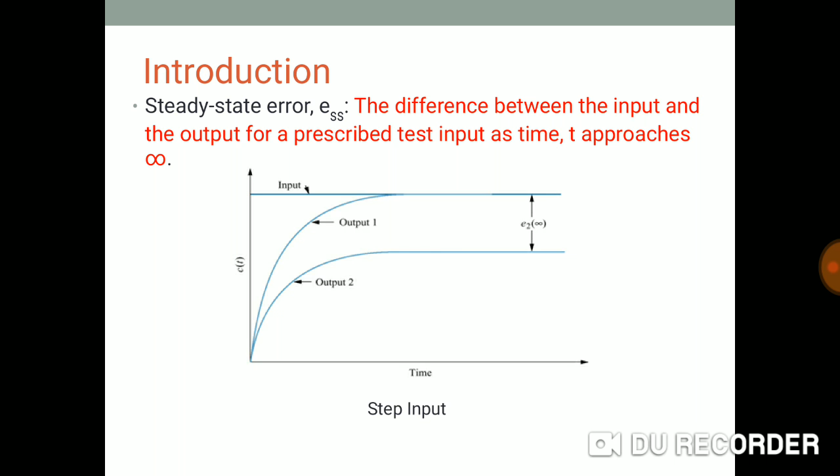First, we'll discuss steady state error. As its name implies, error is the difference between the input and the output for a prescribed test input as time t approaches infinity. Here we consider the step input signal and what kind of output we are getting for the input. Whatever difference we get between input and output 2, that is nothing but an error. Next, the same we have discussed for a ramp input also. Steady state error is designated by e_ss.

Then we'll discuss the test inputs. Test inputs are nothing but different signals. By giving these inputs, we can find out the output. These signals are called standard test input signals. Actually, test inputs are used for steady state error analysis and design purposes. Step input represents a constant position. It is useful in determining the ability of the control system to position itself with respect to a stationary target.

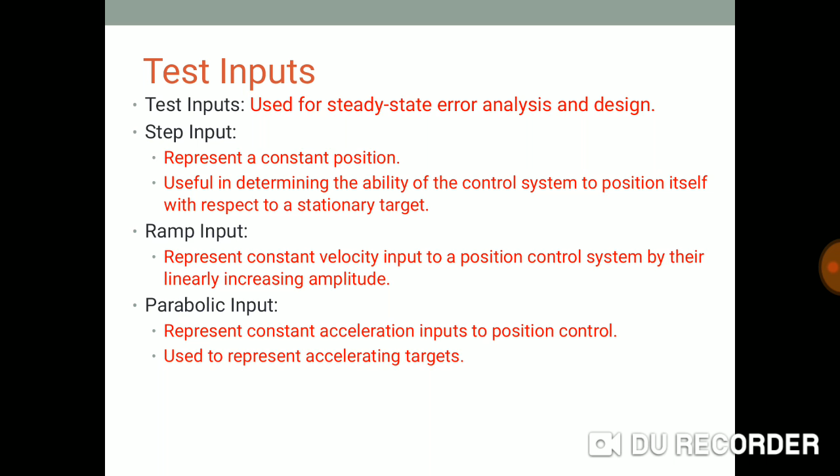Another input is the ramp input. It represents a constant velocity input to a position control system by its linearly increasing amplitude. And the third one is the parabolic input. It represents a constant acceleration input to a position control system. It is used to represent accelerating targets. These are the test inputs.

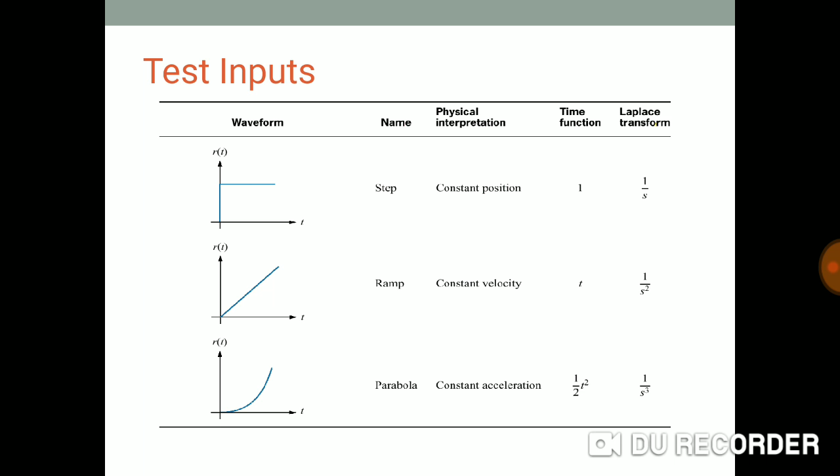The first column shows the waveforms, that is step input, ramp input and parabolic input. Then the physical interpretation: a step is a constant position, then constant velocity and constant acceleration. The time functions for the step, ramp and parabolic inputs are 1, t and 1/2 t squared. And the Laplace transforms are 1/s, 1/s squared and 1/s cubed. One by one we will discuss.

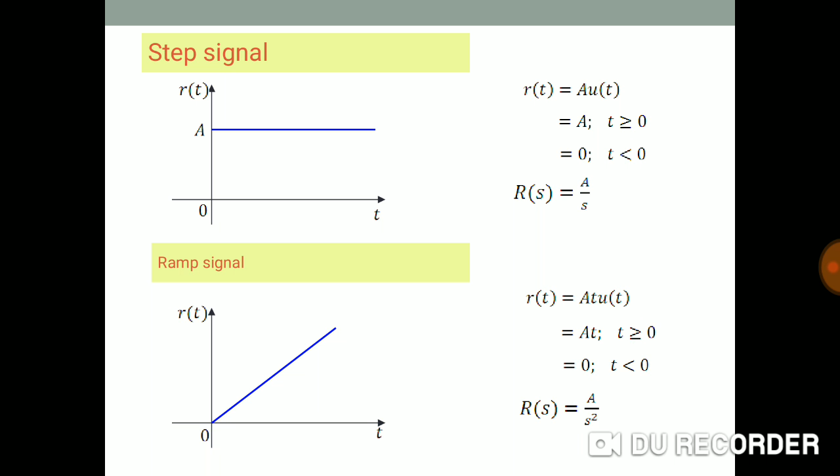First one is the step signal. Here r(t) = A u(t): it is A if t is greater than or equal to 0 and 0 if t is less than 0. The Laplace transform is A/s. If we consider the unit step, that will be 1/s, as A is equal to 1. The same is applicable for the ramp signal. For the ramp signal, r(t) = A t u(t). The function is At if t is greater than or equal to 0, and 0 if t is less than 0. Then the Laplace R(s) is A/s squared.

Next, the parabolic signal. The reference signal r(t) = A t squared u(t). It is A t squared if t is greater than or equal to 0, and 0 if t is less than 0. The Laplace transform for that one is 2A divided by s cubed. And if we consider the constant A as 1, that is 2 divided by s cubed.

Then the impulse signal is delta(t); it's infinity for t equal to 0, and if t is not equal to 0, it is 0. The Laplace transform for the impulse is 1. And the sinusoidal is r(t) = A sin omega t. The Laplace for that one is R(s) = A omega divided by s squared plus omega squared.

Next we'll discuss the unity feedback system. To determine the steady state error, we'll apply the final value theorem. The final value theorem is f(infinity) = limit as s tends to 0 of s F(s). The following system has an open loop gain G(s) and unity feedback since H(s) is 1. This is the block diagram to find E(s). Here unity feedback means the output is directly connected to the input.

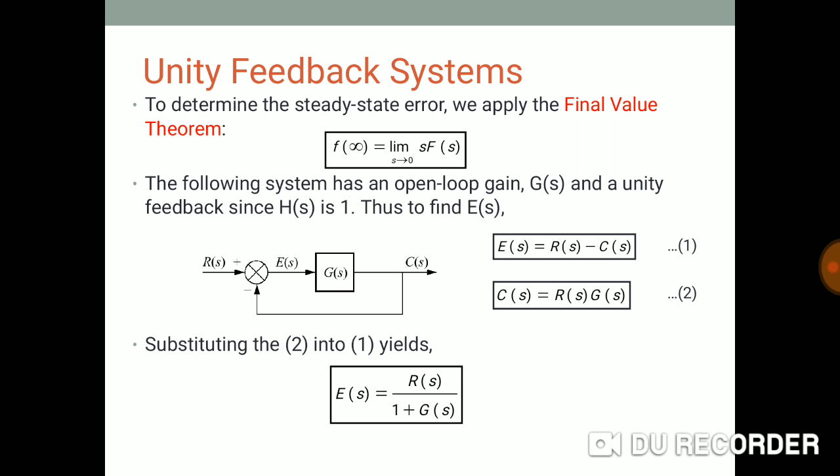Therefore, E(s) = R(s) minus C(s), and C(s) = E(s) G(s). Substituting 2 into 1, the error E(s) is equal to R(s) divided by 1 plus G(s). H(s) is not there as we have considered unity feedback.

Next we'll apply the final value theorem. E of infinity is equal to limit s tends to 0, s into E of s. The equation we got for E of s is R of s divided by 1 plus G of s, then multiplied by s. Therefore limit s tends to 0, s into R of s divided by 1 plus G of s. This is the final value theorem for the unity feedback system.

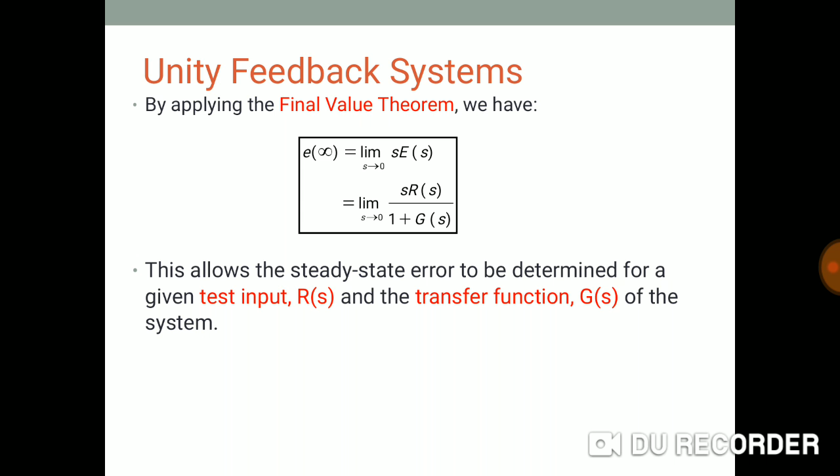This allows the steady state error to be determined for the given test input R of s and the transfer function G of s of the system. Then we will apply the final value theorem for all the inputs: unit step input, the parabolic input, and the third one is the ramp input.

The first one is E of infinity is equal to limit s tends to 0, s into the step input 1 upon s, the Laplace of that, divided by 1 plus G of s. Instead of R of s we have put the value for the unit step from the table we prepared; the Laplace of the unit step input is 1 upon s. We put that here and apply the limit. The s's cancel, giving 1 over 1 plus limit s tends to 0 G of s.

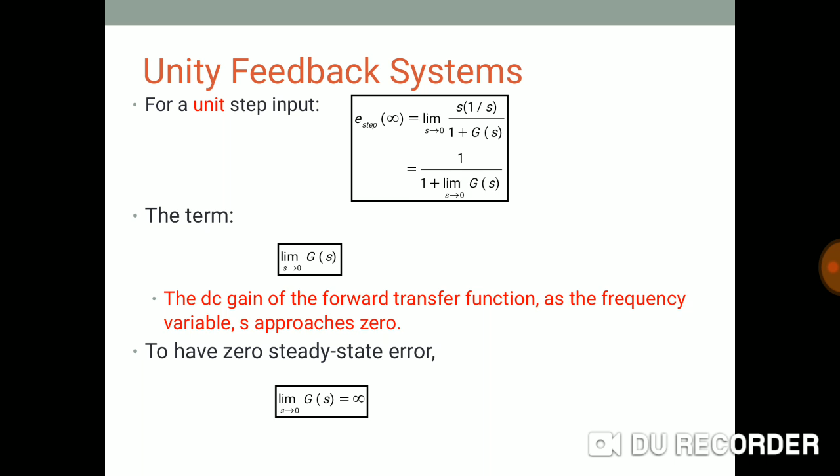The term limit s tends to 0 G of s is the DC gain of the forward transfer function as the frequency variable s approaches 0. To have zero steady state error, limit s tends to 0 G of s should be equal to infinity. The next one is the ramp input.

For the ramp, R of s is 1 upon s square. We put that in, therefore 1 upon limit s tends to 0 s into G of s. This is the steady state error ESS for the ramp, which is zero when limit s tends to 0 s into G of s is infinity. If there is no integration in the forward path, limit s tends to 0 s G of s is equal to 0, and the steady state error will be infinite.

Next for the parabolic, s into 1 upon s cube, divided by 1 plus G of s. The s's cancel, leaving 1 divided by s square plus limit s tends to 0 s square into G of s. For the steady state error for the parabolic to be zero, limit s tends to 0 s square G of s should equal infinity. If there is one or no integration in the forward path, it is equal to 0.

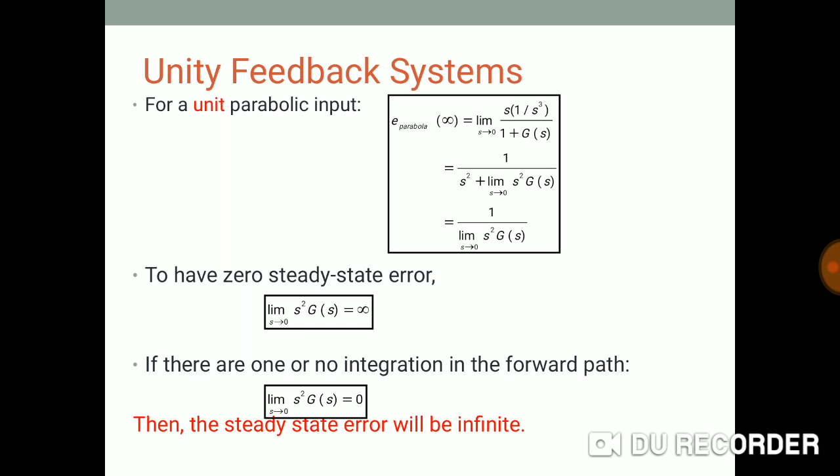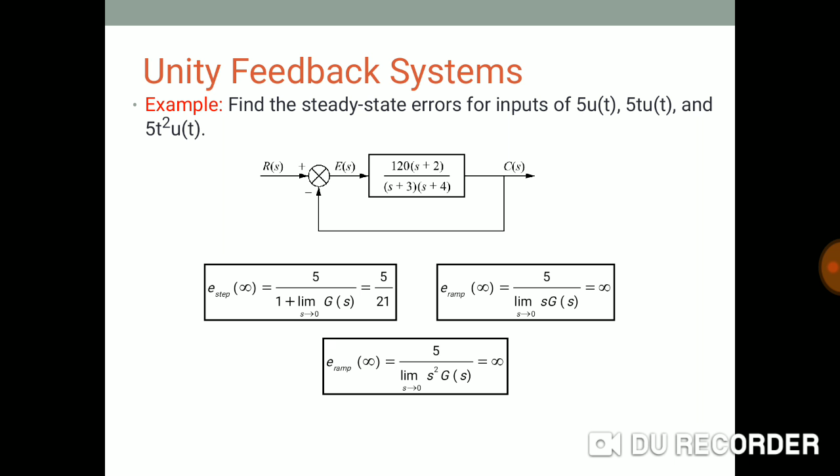This is the example for that. Here we'll apply the inputs, that is 5u(t), 5t u(t), and 5t square u(t). The G of s is provided for us, and we have the formula for all three. ESS for the first one, the unit step, is 5 divided by 1 plus limit s tends to 0 G of s. We have to take the limit of G of s by putting s tends to 0. Therefore here it is 120 divided by whatever G of s gives, so it is 5 divided by 21. By putting the values in the formula provided, we'll get the answer.

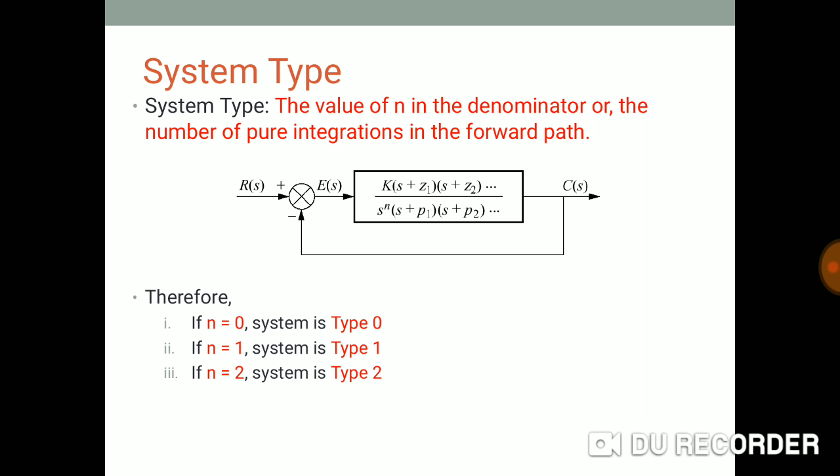Then we'll discuss the system type. System type is the value of n in the denominator, or the number of pure integrations in the forward path. Here is the formula: K into (s plus z1)(s plus z2)... divided by s raised to n into (s plus p1)(s plus p2).... If n is equal to 0, this is a type 0 system. If n is equal to 1, this is a type 1 system. If n is equal to 2, this is a type 2 system.

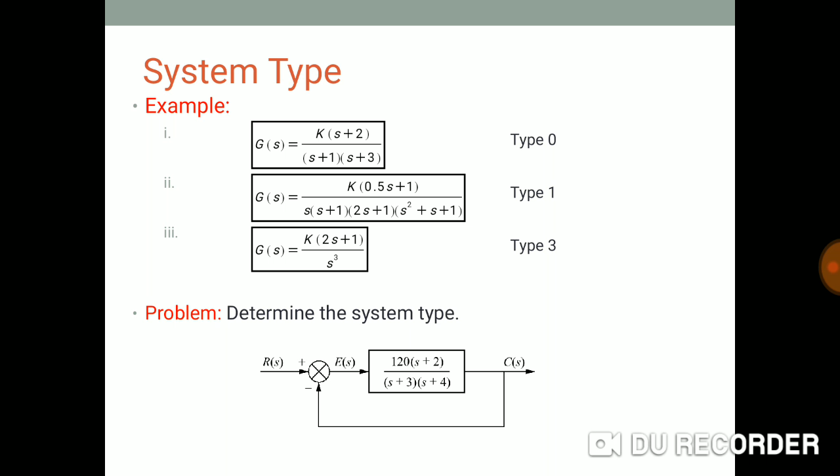There is no s term present, therefore it is type 0. Then the second example below: G of s is equal to K into bracket 0.5s plus 1, divided by s into bracket s plus 1 into bracket s square plus s plus 1. There is s raised to one term, therefore this is type 1. In the same way, the third example is for a type 3 system. Here the example is to determine the type of the system.

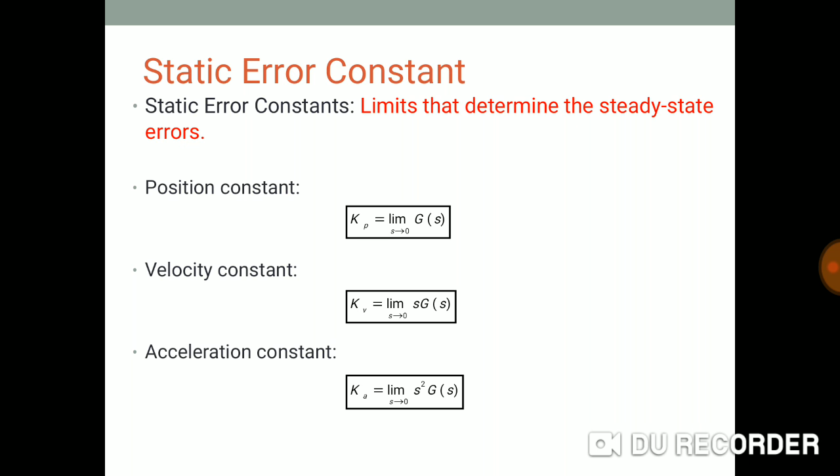Then static error constants, the limits that determine the steady state error, that is the position constant. Whatever formulas we got by giving the inputs, that is the position constant, velocity constant and acceleration constant, are called error constants, denoted by Kp, Kv and Ka. Limit s tends to 0 of G of s, limit s tends to 0 of s into G of s, and limit s tends to 0 of s square into G of s: Kp, Kv and Ka. Then we'll find out those values for every input.

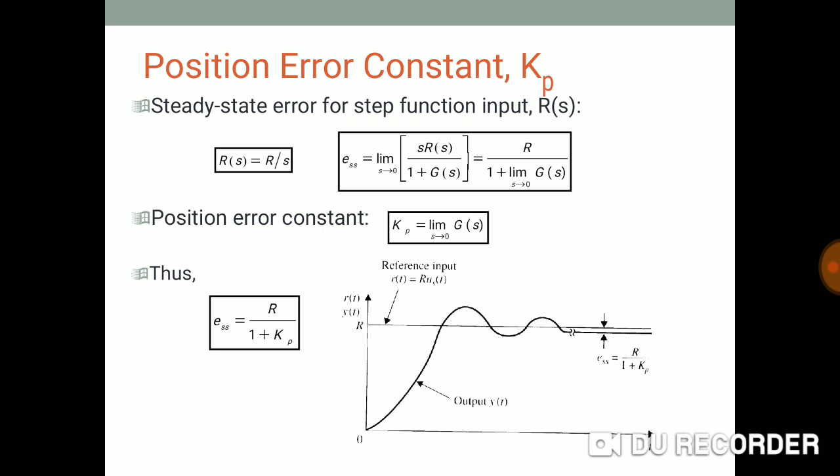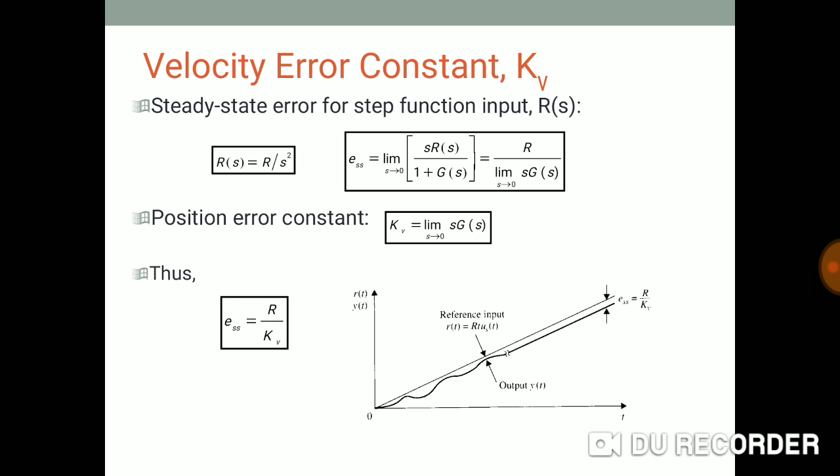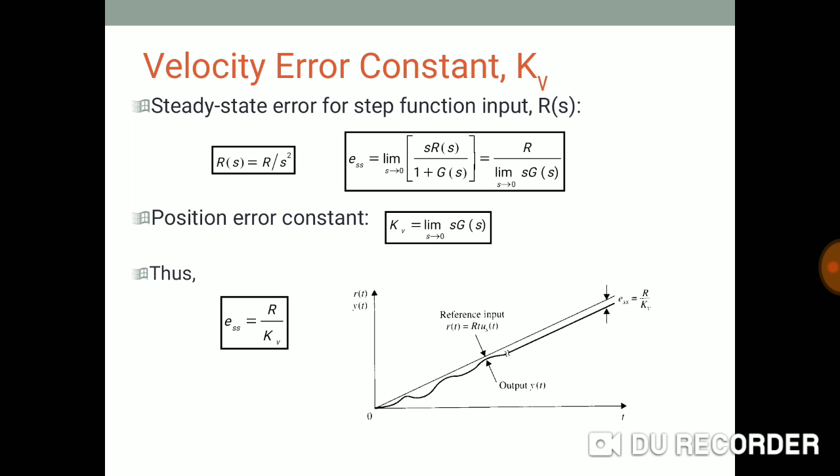Next we'll discuss the velocity error constant Kv. We apply the same, only instead of R of s equal to R upon s, we put R upon s square. Therefore s into R upon s square. Then ESS is equal to R divided by limit s tends to 0 of s into G of s. One s cancels, one remains. Therefore ESS is equal to R divided by Kv. This is for the ramp input.

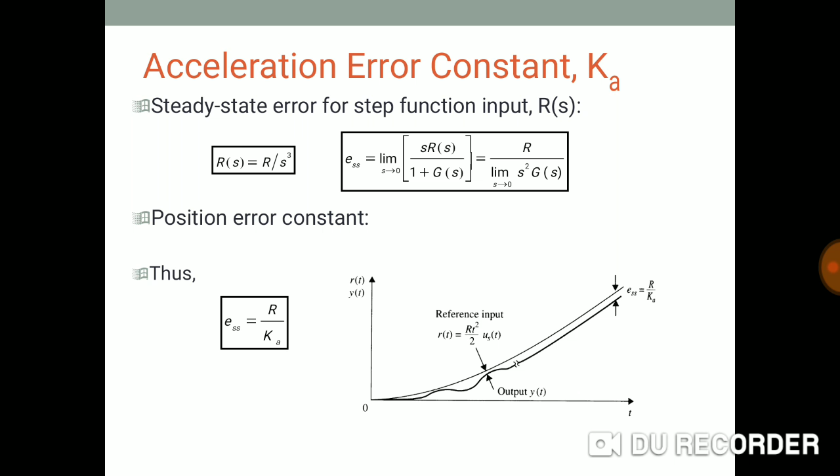Then the third one is acceleration. Steady state error for the parabolic input, R of s is R upon s cube. Here one s cancels. Therefore ESS is R divided by limit s tends to 0 of s square into G of s. Therefore ESS is equal to R divided by Ka. Ka is called the acceleration error constant.

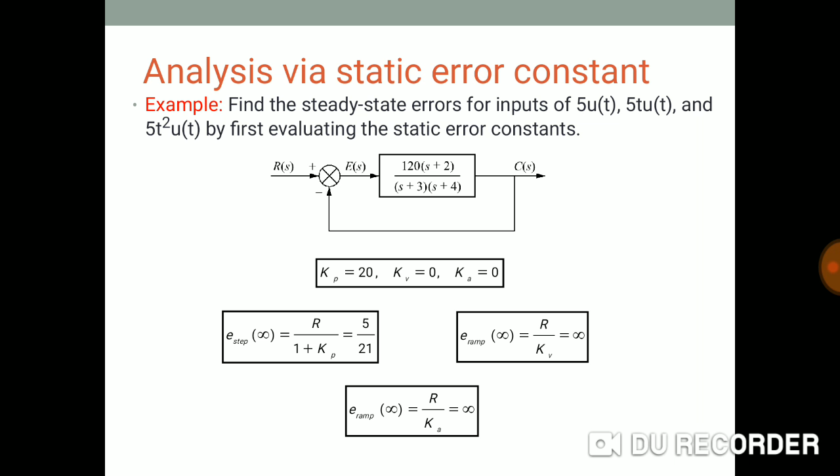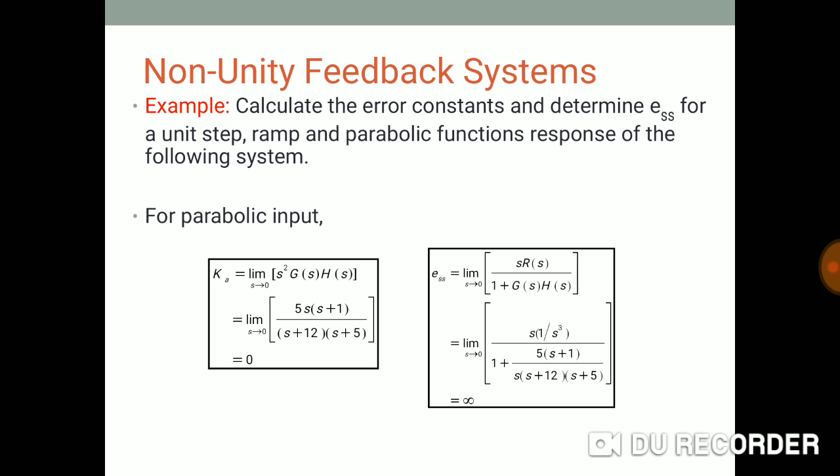Then for non-unity feedback also we can calculate, where G of s and H of s are given. Here it is for unity feedback and non-unity feedback: G of s into H of s. Instead of only G of s, we have to consider H of s also, and apply the same procedure. This is for the ramp input, this is for the parabolic input. Then we can solve the problem with the help of that.